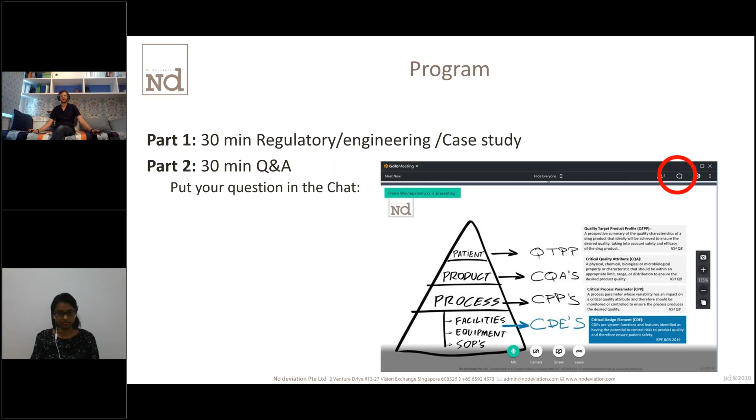So the first part of this presentation will have a regulatory requirement on cleaning validation, a very high-level overview. Then we will look at what we call the critical quality attribute, and then the principle of cleaning, what we call the critical process parameter in this case. And then we will go to talking about the small item and the use of part washer and manual cleaning in sink.

So if you look at the regulatory guidance, and I'm not going to dive too deep into it because all of those are freely available on the internet, so you can scan the QR code or go on it. So you have the ICH Q7 that gives you a series of requirements for the cleaning validation, and we have taken the PIC/S as the reference here, but the PIC/S or the EU regulation are very similar because they are developed in parallel. And you can see that there is a series of requirements you need to follow when you do cleaning validation. Not going to read them to you. We're going to talk a little bit about them later, but we're also going to talk about the challenges that are not in the regulation.

And you can see here that where manual cleaning of equipment is performed, it is especially important that the effectiveness of the manual process should be confirmed at a justified frequency. So we're going to talk about what it is to justify frequency and how can you prove that effectiveness.

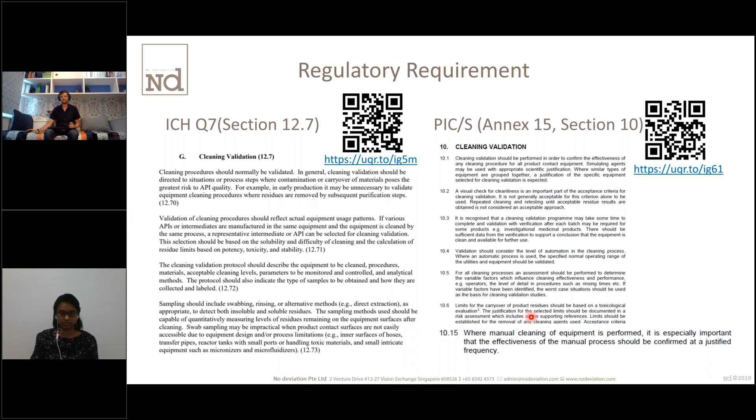One of the interesting guidances I found, and again you have the reference here, is the FDA validation of cleaning processes, a guide for the inspection. I think they ask a series of pertinent questions that are not only valid for the inspection part, but are also valid when you try to design your cleaning process or your equipment to be cleaned and your whole cleaning master plan. Again, here, when we talk about manual cleaning, they ask how variable are manual cleaning processes from batch to batch and product to product. So you should ask yourself those questions.

And in this guidance, they also say that in general, if you apply the quality by design principle, doing testing to prove that your cleaning is effective is not sufficient. What we need in a science-based approach is to justify every step of the cleaning. What is the role of this step, what is the intent, and then demonstrate that we have met the intent of the different steps. So in order to demonstrate the intent, we need to know why we are putting those different steps in the cleaning process.

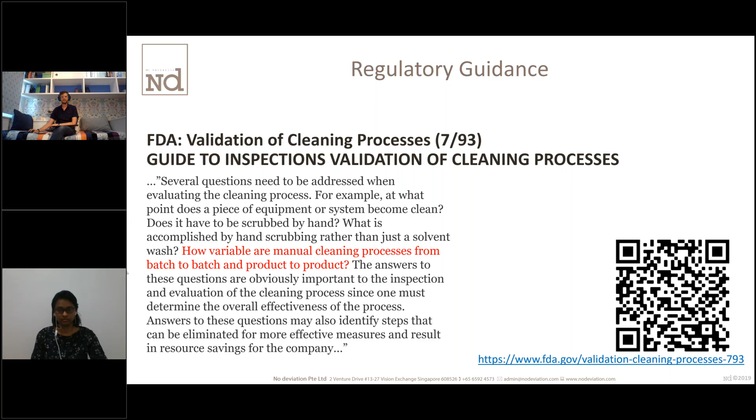So in No deviation, we are familiar with this high level, and we try to put everything in perspective of the patient. Everything we do normally is intended to create value for the patient in terms of safety, quality and drug delivery. So the patient needs a product. This product is made in a process, and this process is done in facilities, equipment, SOPs, utilities. The patient is expecting a quality target product profile, and that product is defined by a series of critical quality attributes that, if we meet them, we are answering the patient need.

And then this process is actually controlled to deliver those CQAs by controlling a series of CPPs. Those QTPP, CQA, CPPs are what you can find in the definitions of ICH Q8. And then in terms of designing facilities and equipment with the ISPE, we define the critical design elements which allow us to be in control of the process, which therefore answers the need of the drug development, meaning building the CQAs into our product. Now, when we talk about cleaning, we don't really call those CQAs from a regulatory perspective, but we have kept CQAs in brackets in our presentation to say this is the reason why we are doing certain steps.

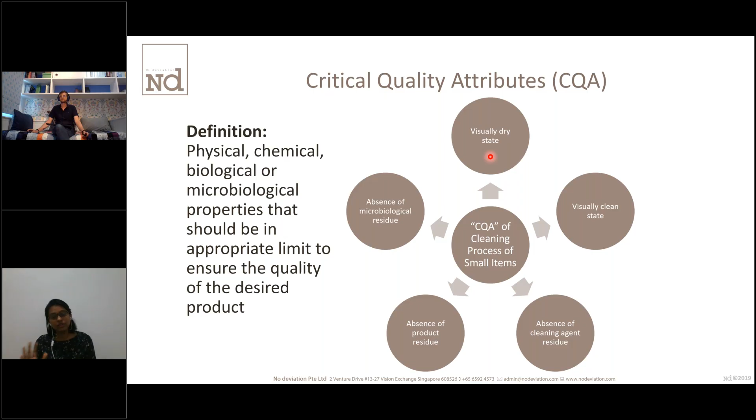So why do we need the items to be in a dry state? Because after we clean, the items will usually be individually packed before they are used for the next batch. So if we have water droplets in the items, it may cause the proliferation of microbes, which will contaminate the next batch. So this is the target that we want to achieve when we clean small items. So if we go to the next slide, we will see how we want to achieve the target.

These variabilities will have an impact on the CQA, and so this should be monitored and controlled to ensure that the process produces the desired quality. Changing any of these parameters will increase or decrease the effectiveness of the cleaning process. So during cleaning, when we want to validate a process or when we want to test out a process, we need to make sure that these parameters are within the specs, so that we can achieve the target, which is to have an appropriate limit in the CQA.

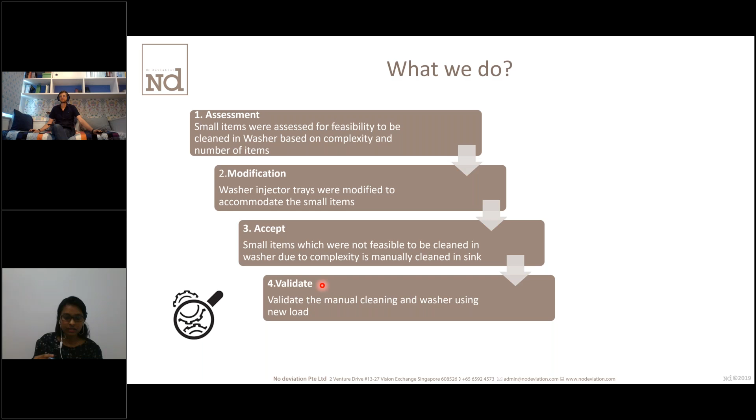And those items were the ones that we validate in the manual cleaning, and the remaining items we put in the washer and do a new validation to validate both the manual cleaning and the washer. So in the assessment, if we go further to the next slide, these are the examples of items that we have assessed whether they can be cleaned in the washer.

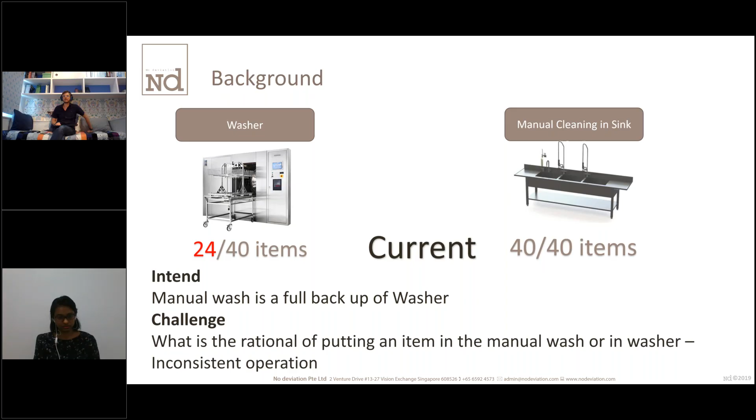I think there are two key learnings here in terms of manual washing and part washer. The first one is if you look at those items here. It's very difficult, when you are in the design of the equipment, to think of all the items you will need to wash in a part washer here.

So it's a little bit like, especially when you are in a green field and you have a new project, whether you are the engineer who needs to design the part washer or the vendor who needs to design the part washer, all you want is a list of items and have physically all those items. Sometimes the process is not completely designed and there's a series of items that the user doesn't really know.

So I compare that to trying to define the load that's going to go in your dishwasher for a wedding banquet 6 months before the wedding, right? So you're going to have a series of cutlery and a series of plates and cups, but exactly which plate and cup and which cutlery, it will really depend on the meal we're going to choose and how many guests we're going to have and things like that.

We are asking the same of our user when we ask him, can you give me all the pieces you need to put in the part washer so that 6 months before I can define this part washer. So there is an iterative process in designing a rack and validating your process that will happen during the project.

What we see here is that in terms of design of the small items, we should minimize the number of items that go in manual cleaning. And we should really say manual cleaning for me is the last resort. Everything should go in the part washer, and deciding that manual cleaning is a backup of my part washer is not a good strategy because it leaves the door open: something is wrong with the part washer, I decide to bring it into the manual cleaning, which is always available.

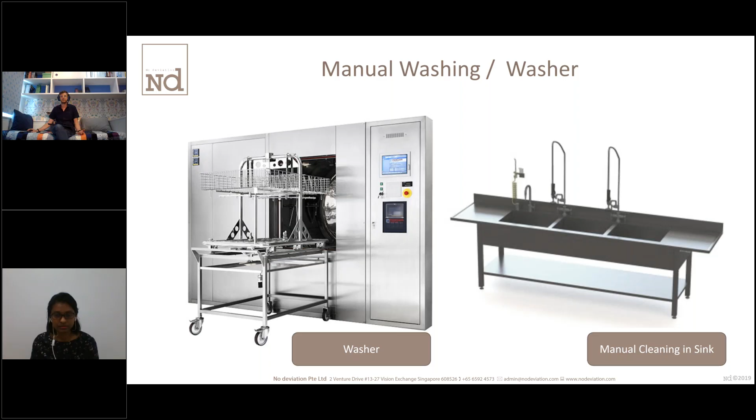But the beauty of soaking everything is that all those little tubes would be completely soaked with water. Whereas if I put an injector in it, I have no idea whether the injector will just shoot through or if I'm going to clean the internal part of those little tubing. Yeah, so that's why we sometimes still go to the manual washing. Hope that answered your question.

How to establish the validation strategy, the contact time, the intermediate rinsing time, and what are the different steps? So the question is, first, how many steps do I need to have, and do I need a pre-rinse and things like that. And the second thing is, how do I define all those parameters? So maybe Maurice, this is a question you can give a glimpse on. I know you can do a whole seminar on it, but how do you define those cleaning parameters? Is it something you can explain a little bit?

Did I mute Maurice? Everybody.

So you're asking me how do I establish the validation strategy, especially on contact time? Yeah. So it's iterative, is the bottom line. So in a cleaning validation, we obviously don't try to commission or validate the cleaning as soon as we start. So you would have done some trials with parts that you think are representative. So you have an idea of the cycle, and you're looking to simulate that.

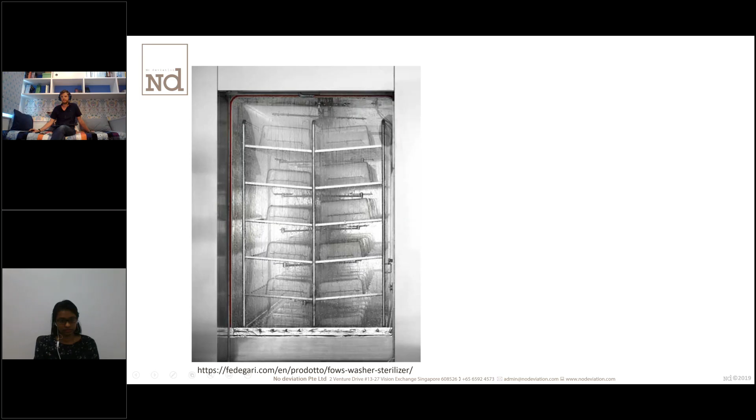And again, as Maurice said, we use coupons, and we also need to use different materials because there are different challenges. So if I take this equipment, plastic like this doesn't have the same adherence of the product as stainless steel. But what you will see also in a part washer is that the drying of the plastic takes forever, and then you end up having drying cycles that take forever, because when we dry in a washer, we generally don't have the same mechanical effect as when I take compressed air to dry the pieces.

So there are a lot of things to what we say, it's beginning with the end in mind when you develop your process. And if any of those pieces is not properly washed and you start to have issues in your process, that's where you start to regret not having invested in an automatic washer. Now, what is really costing in the automatic washer is the design of the rack.

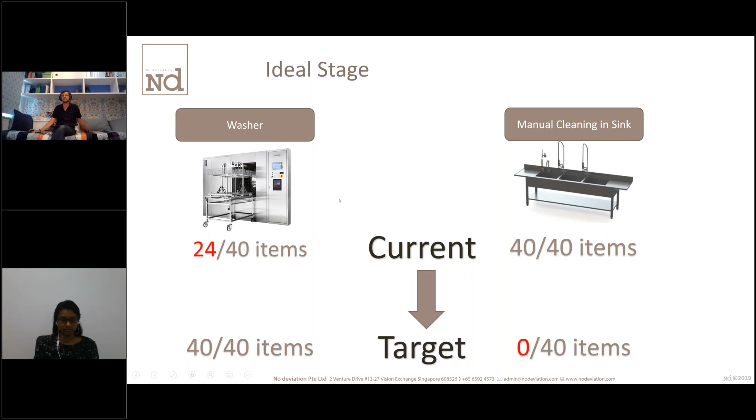Because again, if you try to make those racks an iterative process, we can see here in the presentation that at some step we decided to modify the injector tray and to modify the rack to put the new item. The level of effort to do that is big, because you need to do a new IQ for the rack, a new coverage test for the rack, a new validation for the pieces that are on those racks and things like that.

So think it through before saying that we're going to put everything on those injectors, and think of the flexibility and the agility you want to give with your machine, and also define the right time to design and build the rack.

Can I say something here about that comment? To me, a lot of people lose sight of what we do when we do a cleaning validation. I mentioned before the formula that we typically use. When we do these parts washes, these parts are generally part of a larger system, right? And that limit has usually been established as part of the larger system. And so one of the big considerations about the two choices, to me, is the location in the process.

It may seem obvious, but if you think about the way the formulas work, if we're using swabbing to establish a limit, we're making some assumptions based on the shared surface area about what can actually happen. And the further away we are from the filling point, the less critical that assumption is, in my opinion. And likewise, when we do rinsing and we think about shared surface area, we've also got an assumption that's possibly not as worst case. And so to me, the decision about a parts washer becomes more critical as you get closer to the patient.

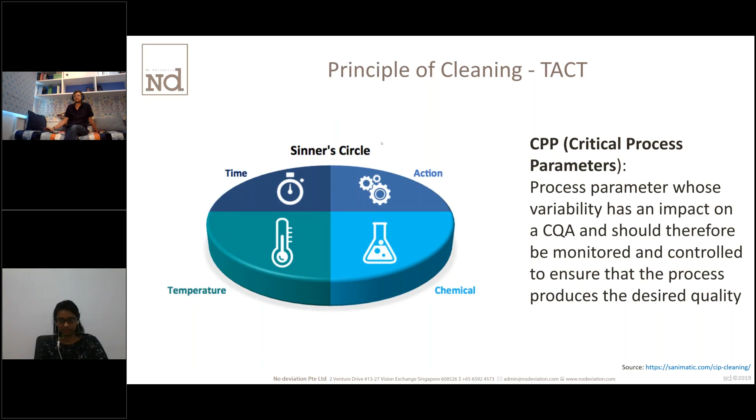The other one is regarding the process itself. Of course, you have the pre-rinse, rinse, pre-wash, wash, rinse, final rinse. Regarding the final rinse part, besides recirculating final rinse, there's also non-recirculating final rinse. Basically, it's like a single pass-through, and we have studies.

The studies have shown that customers can actually have a much lower conductivity in their product if they have, for example, 2 non-recirculated final rinses as compared to 3 recirculated final rinses. So that actually helps to save water.

Just think of it as an analogy of going for a bath. If you soak yourself in a bathtub versus having a shower, a shower is a single pass-through, whereas in a bathtub everything is recirculated, including the residues, so everything gets stuck there. Non-recirculated final rinse is just like a shower. Everything just goes through, flushed down once.

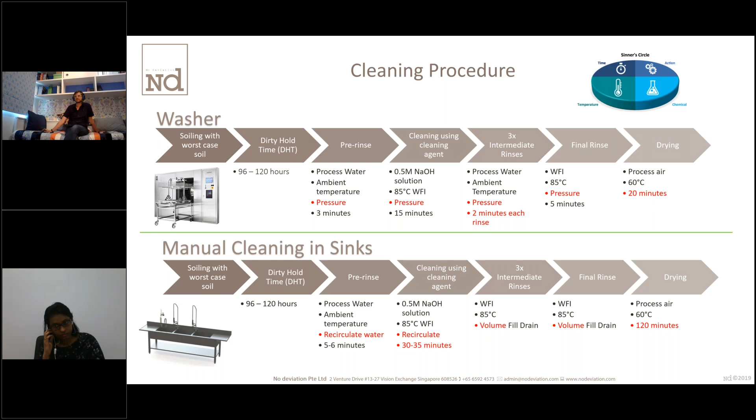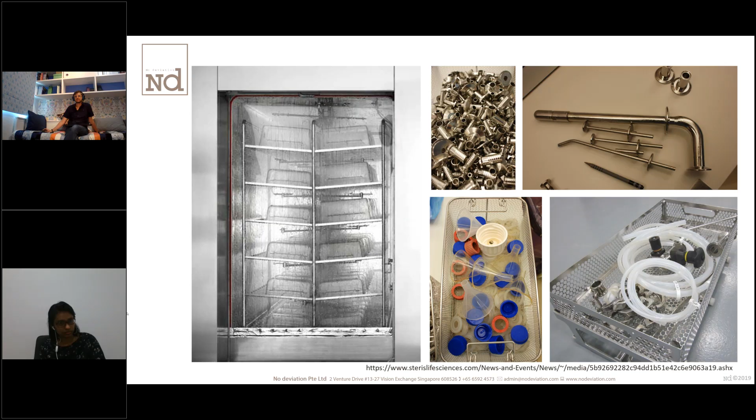Lastly is regarding the washing accessories. I saw that you have shown a variety of washing accessories, which is good, and you also did point it out in your slide. In the washer situation, having the standard accessories is good. The main point of an automated parts washer is actually the washer accessory. There are both fixed standard accessories as well as custom accessories.

Custom accessories will be able to address the issue of washing complex items, which probably the operator can also wash himself, but there are some parts within some items that even an operator may not be able to manually wash. So a custom washing accessory would be ideal. And with a custom washing accessory, if you can load everything into one, you can potentially save the number of cycles required to wash the item itself.

For example, if you need maybe five cycles using standard accessories to wash items, maybe it can be done with one or two cycles using a custom accessory. So yeah, these are the additional points that I'd like to share based on what I've seen so far, just some points for you to take note.

I agree with you. I put the reference of the different pictures we got here, and there is a PE magazine, also ISPE, that explains the difference between a custom washer, a laboratory washer and a dishwasher at home, and what you can do in each of them. So if you are interested, we could do another seminar on the design of equipment, how to wash, or CIP and things like that. So valid comment, Nicola. Thank you for that. Thank you.